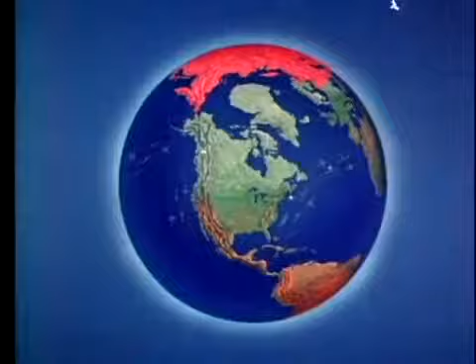Sprawled across North America, from the polar ice cap to the Mexican border, is a giant with 1,000 eyes. Day and night, fair weather or foul, he guards his homeland. This giant is the air defense system of North America, a vast and intricate maze of radar networks. And through the electronic eyes of this giant, we are able to see the enemy before the enemy sees us.

These radars never sleep. Round the clock, they stand ready to do their part in minimizing the penetration of enemy bombers. And round the clock, their quietly pulsing hearts, the magnetrons and the klystrons, help generate the power for peace that keeps America strong.

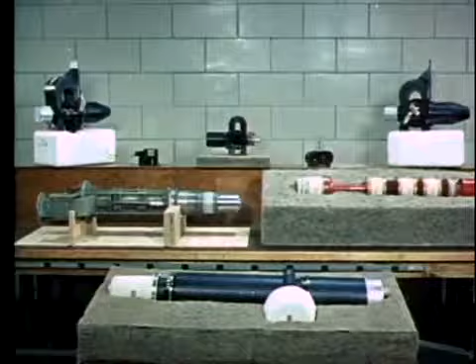These microwave power tubes, the magnetron to generate the radar signal, the klystron amplifier for radio communication, and radar are the subject of our story. It is a story about these vital tubes, but even more about you, the men who work with them. When you have a well-trained maintenance man with a well-adjusted radar at a well-chosen site, then you've really got a winning team.

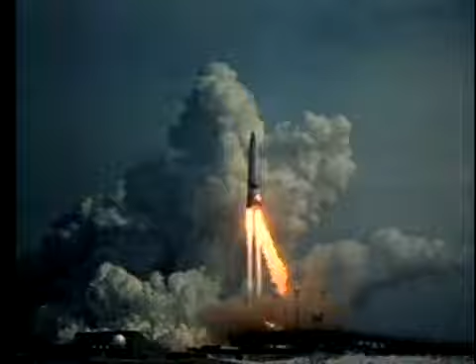They keep the airborne radars operating and ready for crucial missions. In missiles that depend upon radar for guidance. In bombers that depend upon radar for bombing and navigation. In interceptors that depend upon radar for fire control. And in reconnaissance and search aircraft that depend upon radar to extend their vision.

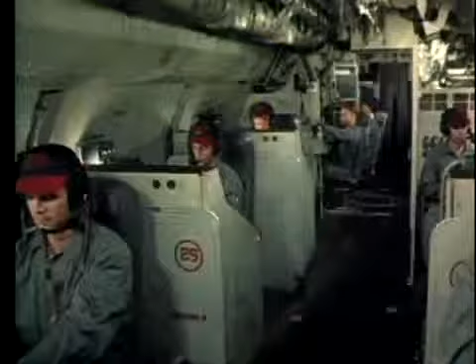Years of scientific research and millions of dollars worth of equipment have gone into this aircraft. But only if the maintenance men keep the radar functioning can it complete its mission. When something goes wrong, they've got to make a quick decision, whether to attempt repairs in flight or abort the mission.

There's trouble here, that's for sure. But what kind of trouble? First, they check the radar scope presentation. Sometimes this gives a clue. But the most reliable analysis comes from the test equipment on the monitor panel.

The spectrum analyzer shows them the conditions in the circuit. It tells them what part of the equipment is malfunctioning and helps trace the cause of trouble. Here's the RF spectrum waveform. The output pulse of this radar transmitter is definitely abnormal. This is the way it ought to look. But this presentation clearly shows a disturbance, probably caused by arcing in the antenna waveguide.

The cause might be moisture in the waveguide, corrosion, dents, or scratches. Another trouble spot could be the pressurized antenna system. Loss of waveguide pressure will also cause arcing. Yes, the pressure's low. This is a danger signal. If this arcing continues, the magnetron output window may be damaged, the tube's vacuum lost, and the magnetron destroyed.

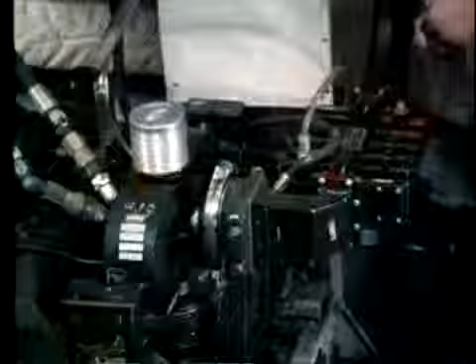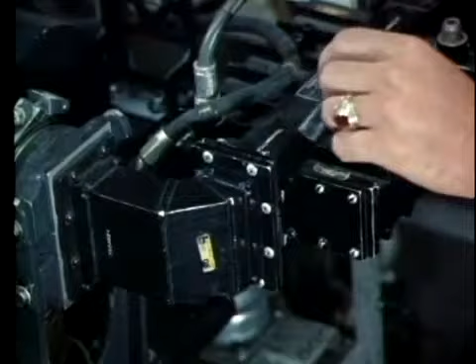Waveguide joints should be tested to make sure they're airtight. This man is making a liquid soap test. See where the bubbles are forming? He's found the trouble. But how serious is it?

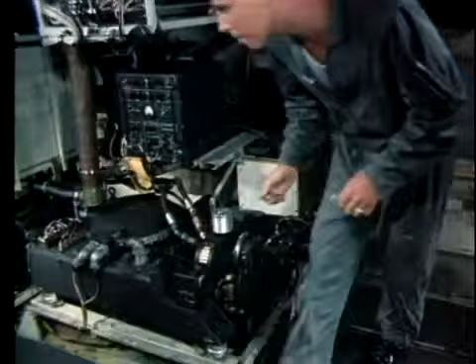He checks the spectrum analyzer again. It looks bad. See how the pulse has changed? Finally, the main pulse deteriorates completely. Bad news. The magnetron is seriously damaged. It's beyond repair. This means shut down the equipment and get ready to install the spare.

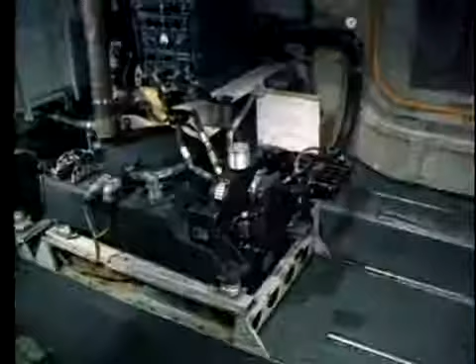While they're working, let's take a look inside the magnetron. Animation shows what caused the malfunction. We'll turn time back a few hours and show the Maggie functioning normally. As the pulse from the modulator is applied, the Maggie produces radio frequency oscillations to form the radar pulse.

This energy is then coupled into the waveguide and directed to the antenna for transmission. Energy is reflected back along the waveguide toward the magnetron. Normally, when the antenna system is in good shape, the reflected wave won't be strong enough to cause arcing at critical points.

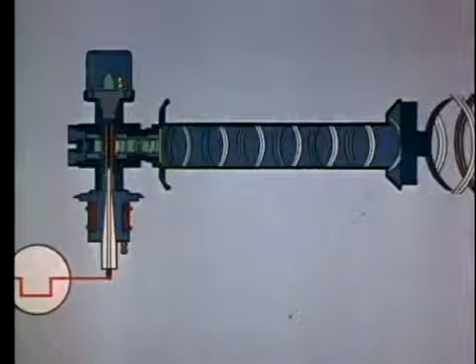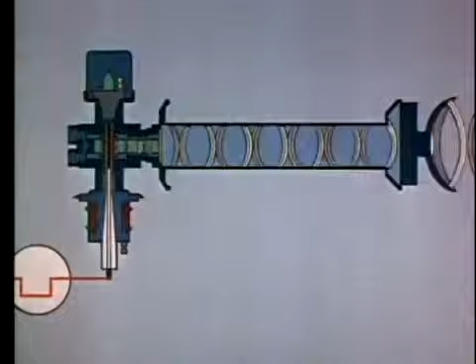But as conditions such as loss of waveguide pressure develop, the antenna characteristics change and the reflected wave becomes greater. Then arcing may take place at the point where the radar wave leaves the magnetron, causing the magnetron output window to crack or puncture. As the vacuum is lost, the heater oxidizes and burns out. The cathode cools. Air seeps into the interaction space, and arcing occurs with each pulse.

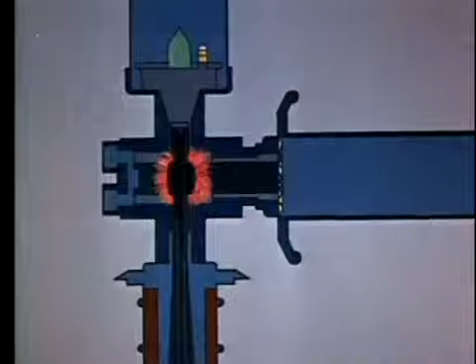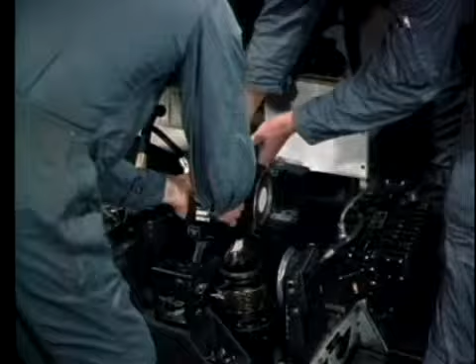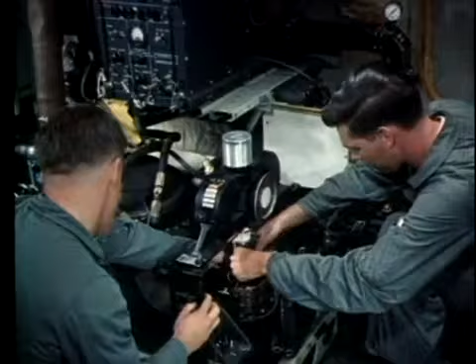After the magnetron has been unbolted, the filament and cathode connections are uncoupled. A large magnetron like this one requires 2 men to handle it safely.

Before a Maggie is replaced, all connections, mating flanges, and sealing surfaces should be inspected. Insulating oil should be examined for foreign matter. Damaged or worn gaskets should be replaced.

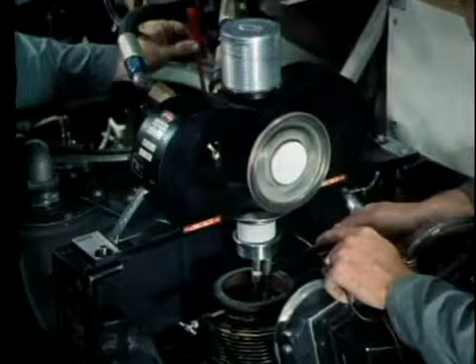Heater supply voltage should be established at the value marked on the tube. Later, when the plane returns to base, the heater voltage should be double-checked with an accurate instrument.

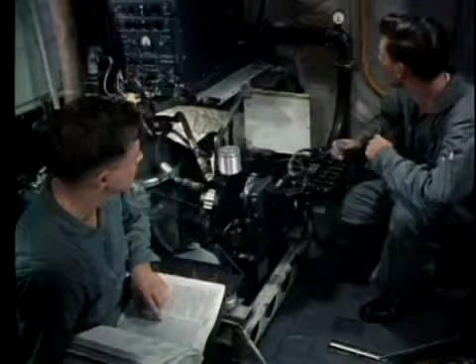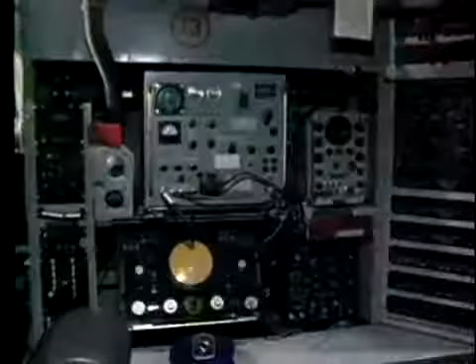Now that the spare magnetron has been installed, further tests are necessary. The technician must make sure he has the required pressure and that there are no air leaks. Instructions concerning the care of pressurized antenna systems will be found in the appropriate tech order handbook. The liquid soap method is a simple way to check for pressure leaks and may be used where more accurate means of testing are not available.

Test equipment is used to analyze the performance of a newly installed tube. The output pulse is checked on the spectrum analyzer. See how the large hump or main bang is symmetrical and sharply defined. The side lobes are relatively small. A presentation like this means that the Maggie is firing properly.

Not only that, it means that these technicians know their jobs. They were able to analyze the trouble correctly and replace the magnetron in flight. Because they knew what to do, this aircraft was able to complete its mission.

Let's take a closer look at these microwave power tubes. Magnetrons costing from $100 to $10,000.

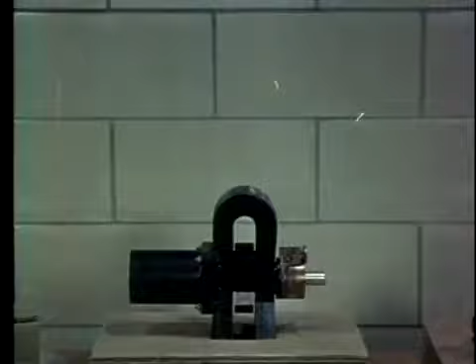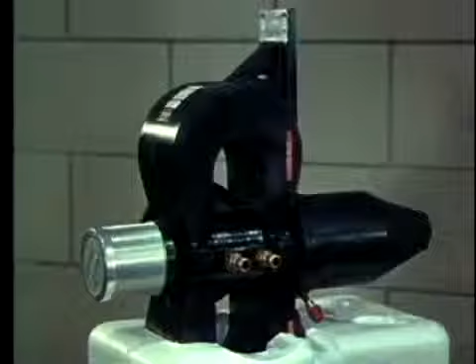Klystrons costing from $1,500 to $25,000. Why so expensive? Let's see what's inside them. Look at this. Parts so critical, they must be inspected through a microscope.

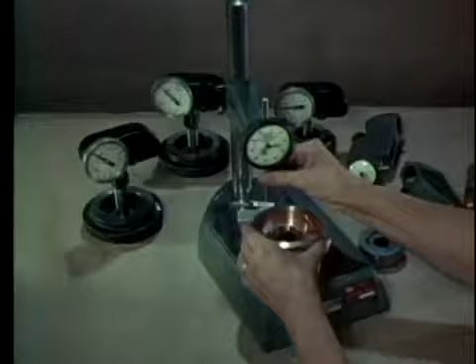Tolerances accurate to 4/1000ths of an inch. To build them to such close tolerances requires involved manufacturing processes. Specialized parts must be carefully assembled.

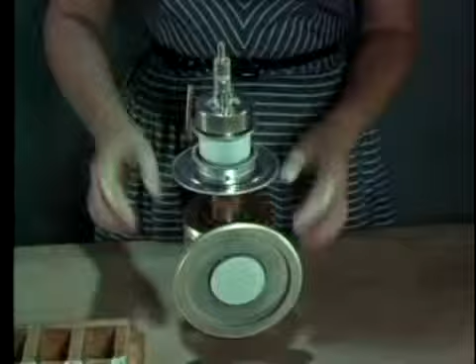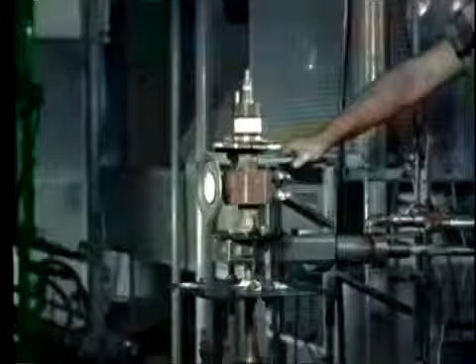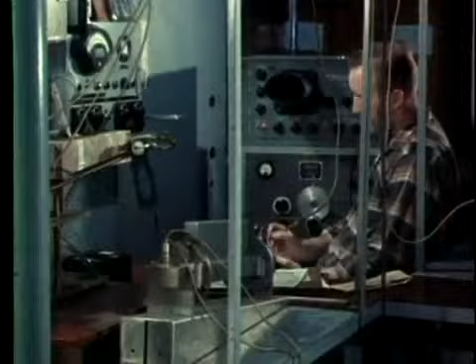The completed assembly is heat treated to bake out gas molecules, so that they may be removed by an evacuation machine. External mechanical parts, such as couplings and magnets, are installed. The final step is rigid testing of electrical performance to make sure it meets the high standards required.

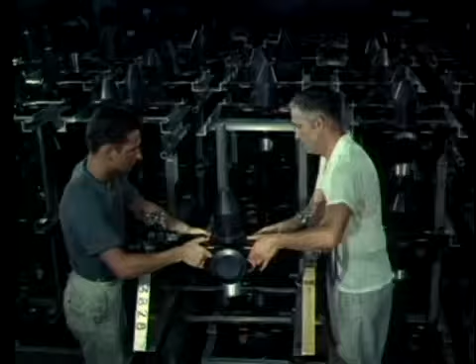Pressure tests ensure leak-proof connections throughout. Now the tubes can be put into storage. Even here, should tiny defects develop while on the shelf, continuous sample testing will reveal them. Before shipment, the delicate tubes are carefully packaged.

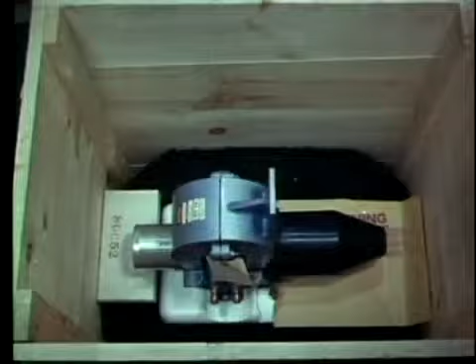The quality designed in during research, built in during manufacture, maintained by rigid testing and careful storage, will reach the user intact.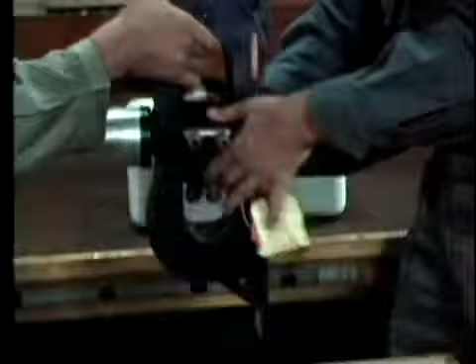Here are a few basic rules on proper handling. Always use 2 men to lift a heavy tube. A portion of a carton makes a good tube stand, protecting delicate parts from damage. But a wooden rack is better and lasts longer.

Save all the cartons and packaging materials. Use them to return defective tubes to the factory.

Magnetrons should be separated at least 12 inches. Then their magnetic fields won't interact. Don't store them on steel shelves or they may be degaussed.

Don't use steel tools. Use non-magnetic tools. Following these simple rules will save time and trouble, prevent damage, and save the Air Force many thousands of dollars each year.

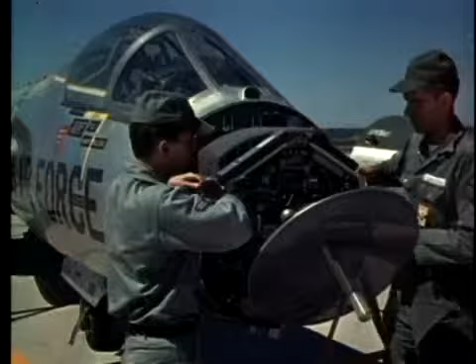On most of the smaller high-performance aircraft like this one, it is not possible to do in-flight radar maintenance. Therefore, most of the work must be done in the electronics maintenance shop. This aircraft has just aborted an intercept training mission. The reason: radar malfunction. Had this mission been the real thing, an enemy bomber could have broken through our defenses.

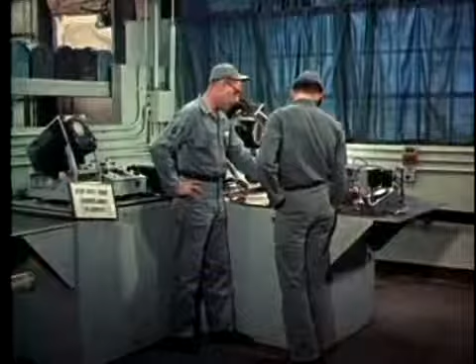The maintenance man's job is to find out why the radar malfunctioned and correct the trouble. You'll see that although these radars come in smaller packages than those on larger aircraft, they are just as big a maintenance problem. The maintenance supervisor is in charge of this work.

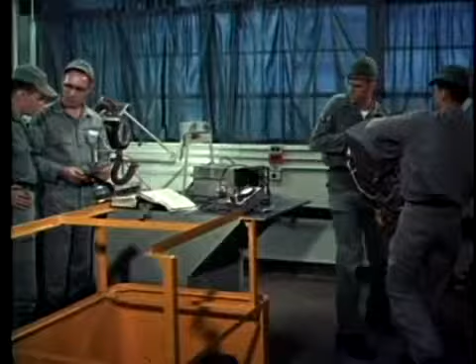Before teardown of a defective black box is started, the operational defects should be identified or at least isolated to a particular subchassis. The pilot's report on the radar failure may give a clue. Comparing the report of malfunction with equipment handbooks may also help to isolate the defect. But the best aids to repair are the analytical approach of the technician and the special test equipment he uses.

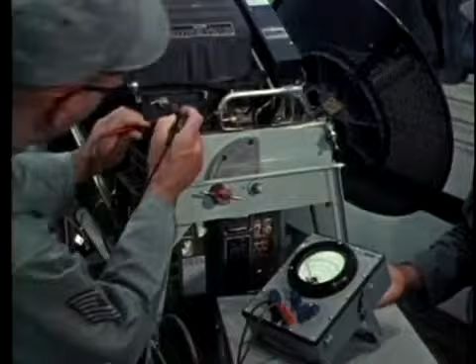An important point to remember is that the transmitter malfunction may be caused by parts other than the magnetron. Wherever possible, other circuit components should be checked before power is applied. A simple resistance check will often reveal a short circuit.

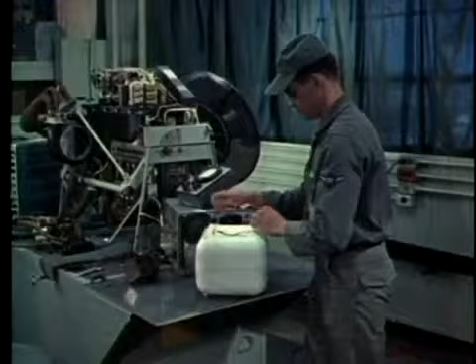That's what the trouble is here. The airman will carry on from here and trace the short circuit. So far, so good. He's found a shorted filament transformer and replaced it with a new one. But what's this? He's decided to change the magnetron, too.

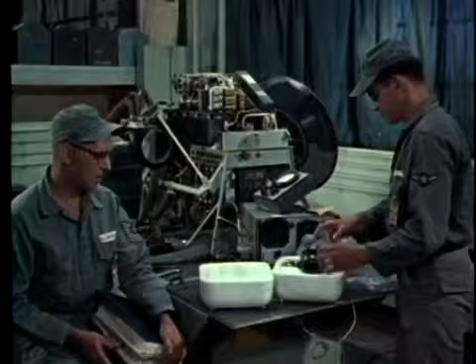The supervisor disagrees. Tube swapping is not a good idea. The old magnetron should be thoroughly tested before any decision is made. Testing showed that the old magnetron should be replaced. This has been done. Now let's see how the new Maggie behaves.

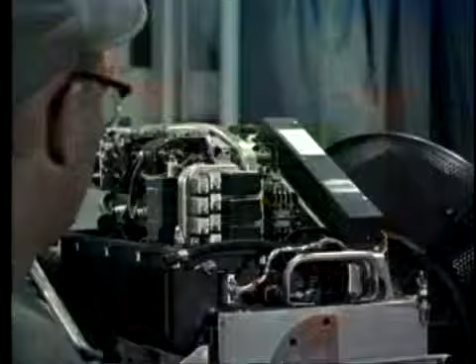This is confusing. The spectrum analyzer shows arcing. Let's look inside the tube and see what's causing it.

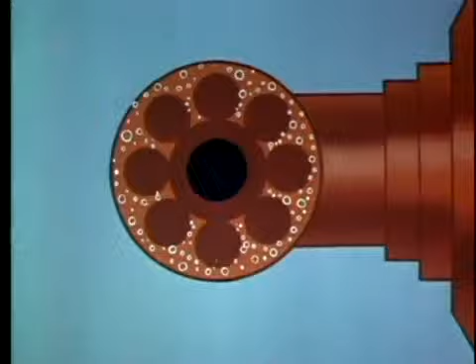Magnetrons are made of porous metals, which usually trap a small amount of residual gas. During storage, gas molecules migrate into the interaction space surrounding the cathode. When the tube is installed and power applied, it will operate normally if the gas content is low. But if gas content is high, arcing will occur with each modulator pulse.

This arcing might be mild or severe. Frequently, tubes with residual gas can be restored to normal operation by a suitable break-in or seasoning period. During break-in, the gas molecules are driven back into the walls of the tube, and normal operation resumes. If the equipment is operated frequently, normal operation should continue throughout the life of the tube.

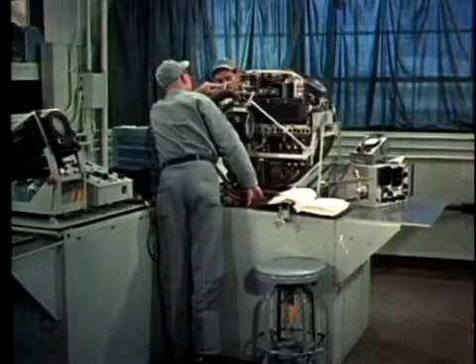Occasional individual arcs may also be noted in a normal tube which does not contain gas, but this behavior is due to transient conditions and should be considered as normal. All new tubes which display arcing when they are first installed should be thoroughly tested and analyzed before being discarded. This will save the government both time and money.

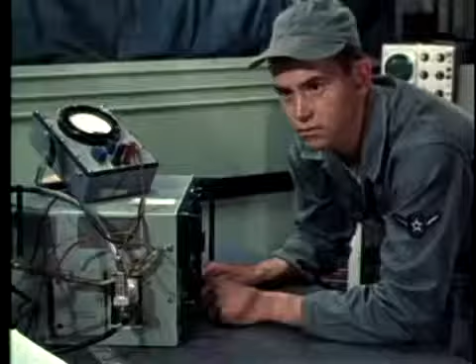The repairs are finished. Now comes the break-in procedure. Proper break-in can clear up various degrees of internal arcing. But watch the spectrum analyzer carefully. If frequent arcs occur, switch to standby immediately.

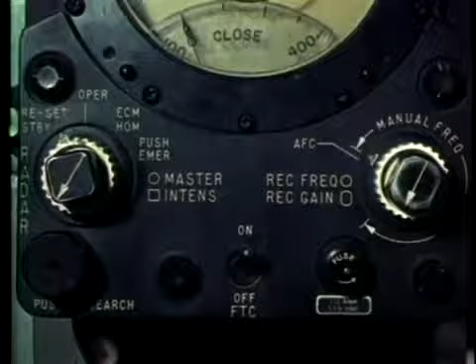Small magnetrons may be damaged if severe arcing is allowed to continue more than 2 seconds. The range selector switch must be changed to short pulse before the magnetron is operated.

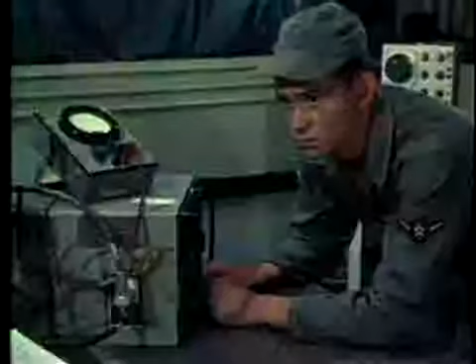If only sporadic arcing occurs, operation may continue. But a series of arcs may cause the overload to pop. In this case, reset the switch and continue the break-in.

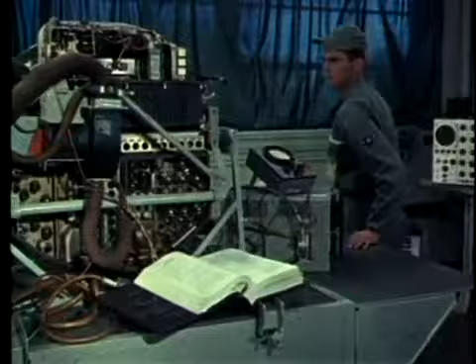To avoid possible damage during break-in, the technician should keep a close watch on modulator tubes and other components of the RT unit. The time required for break-in will vary with the tube, conditions, and methods used, but normally break-in can be accomplished in 20 to 60 minutes.

When break-in is complete, and only infrequent arcs or misfirings occur, operation may be regarded as normal, and the equipment made ready for service.

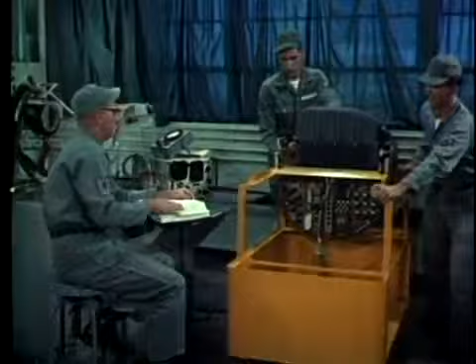In addition to the airborne radars, there are a great many ground radar sites scattered about the continental United States and Canada. They are found in almost every type of American scene: the dusty expanse of the plains, the northwoods, the heat and humidity of the deep south, the rolling farmlands of the Midwest, and the saltwater scenes of our coastal areas.

Each of these has its own problems of maintaining and efficiently operating its microwave power tubes on a round-the-clock basis. Some of this equipment is completely automatic, but experienced technicians are always nearby, just in case. At the many radar sites where there is no standby equipment, the maintenance man is an even more vital unit in the organization.

In the operations room, observers keep constant watch on the radar scopes. Here's trouble developing.

When equipment starts to malfunction, quick repair is a must. These men are so used to the sound of the equipment, they can tell by listening whether the magnetron is operating or not. It's not.

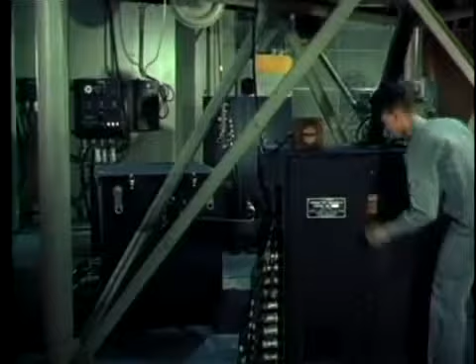Something caused this radar to quit. What was it? Sometimes the meters will tell the story. The filament current has dropped to zero, and the filament voltage is too high, indicating that a portion of the heater element is open. A quick, careful analysis has to be made.

Here is where maintenance skill and training pay off. The question is, has the magnetron become inoperative because of heater failure? Or is there another cause?

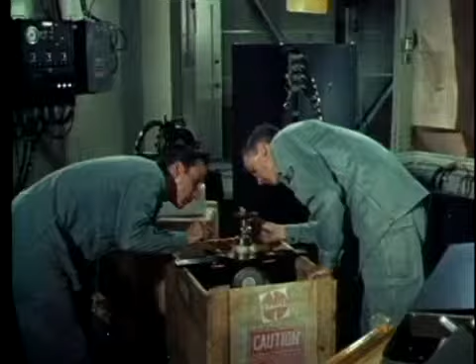Yes, here's something. The insulator is pitted. High-powered magnetrons like this one have insulator bushings immersed in oil. It might be that the insulating oil has broken down. Better check this.

Here's the answer. Contaminated oil. The oil failed to insulate. Oil can break down after long exposure to heat and high voltage. Oil may also be contaminated by dust, moisture, metal particles, or air bubbles.

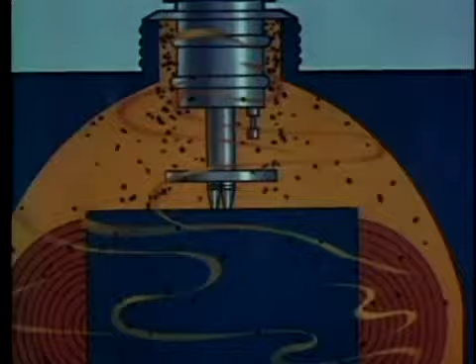Here is how contamination breaks down oil. As contamination accumulates in the oil, current paths are created between high voltage terminals and ground. As the condition becomes worse, due to increase of contamination and change in oil structure, a definite high voltage path for corona discharge is created in the oil.

The corona discharge begins to erode the surfaces of the insulator. As the insulators are penetrated, the vacuum in the tube is destroyed, and the tube is damaged beyond recovery.

The maintenance men have completed oil replacement using all precautions to prevent contamination. They have checked the grade of oil against tech orders and factory instructions.

But before installing the new Maggie, all mating surfaces and flanges must be inspected and cleaned or replaced as required. It is also necessary to check waveguide parts, replace gaskets, coolant hoses, oil fittings, and so forth.

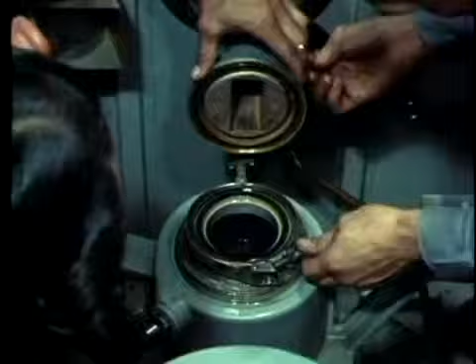Be sure all electrical connections are secure. Careful, watch out that terminal doesn't hit the cabinet. That could ruin the tube.

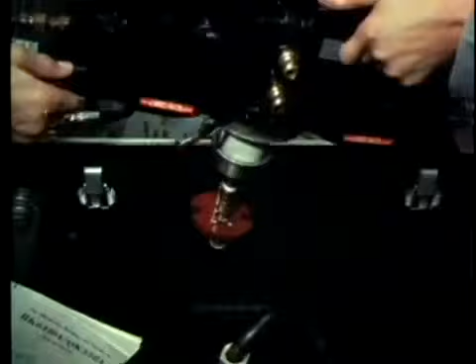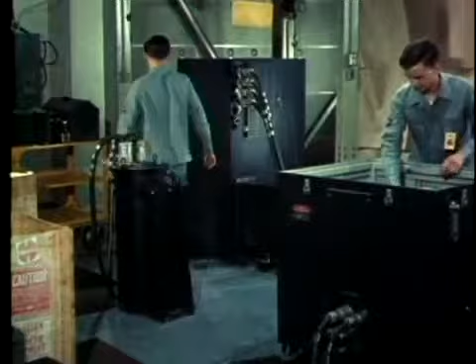Make certain that all clamps, bolts, coolant hoses, and so forth are secure before operating the tube. All set? Okay, hit the power button. Uh-oh, that one didn't last long.

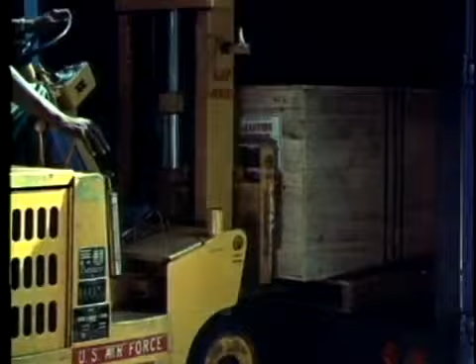There are many reasons why new tubes may fail to function properly. One of the primary causes of tube failure is damage sustained during transportation and handling. This damage may occur during shipping or in the depot, or during Air Force distribution to the base.

Here is what actually happened to that new tube which failed to operate. Nobody saw it happen. Nobody's going to tell. And nobody's going to get the slightest use out of that magnetron.

But these men don't know this Maggie fell off a truck. They just know it won't work. Could it be something wrong with the rest of the equipment? A short circuit? A bad connection? Or should they pull out this Maggie and install another?

They've installed another new Maggie. They've also followed correct procedure, allowing the heater to warm up 5 minutes before applying power to the anode. Ah, it works.

But wouldn't it have saved them a lot of time and trouble and expense to the government if that delivery man hadn't dropped the Maggie off his truck? You see, the maintenance man really is important. If he does his work correctly, so will the radar. The magnetron is only one type of microwave power tube used by the Air Force.

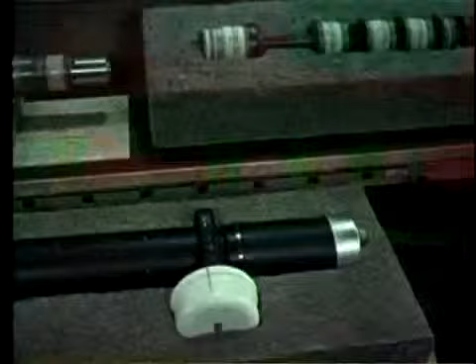Another very important type is the power klystron. Klystrons are made in many shapes and sizes. All of them are powerful and expensive, ranging from $1,500 to $25,000.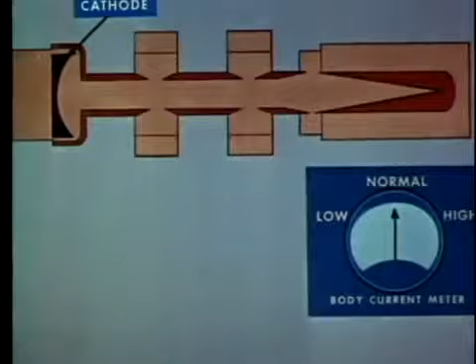Let's look inside a typical two-cavity power klystron and see how it operates. The beam current is emitted by a heated cathode and passes through the drift tube sections.

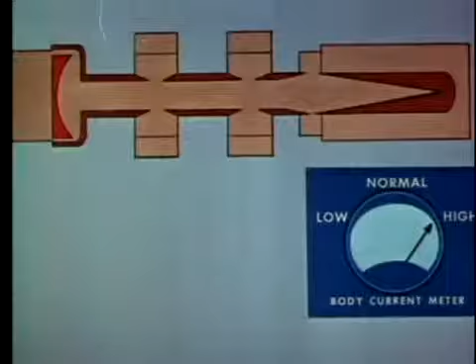Since electrons in the beam have like charges, they repel each other and tend to diverge, to be absorbed by the walls of the drift tube sections. But electromagnetic coils placed along the tube align them into straight paths. However, misalignment of the focus coils can seriously damage the drift tube tips. Therefore, it is most important to adjust the magnetic coil currents properly during installation of the tube.

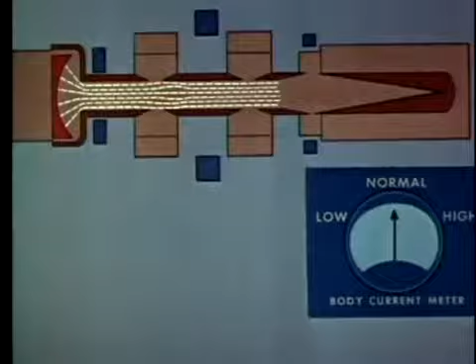When a steady direct current is flowing through the tube, an RF signal from the RF driver stage is introduced into the first cavity resonator. As the cavity is tuned to resonance, a strong RF field appears between the drift tube tips, which form a gap in the resonator.

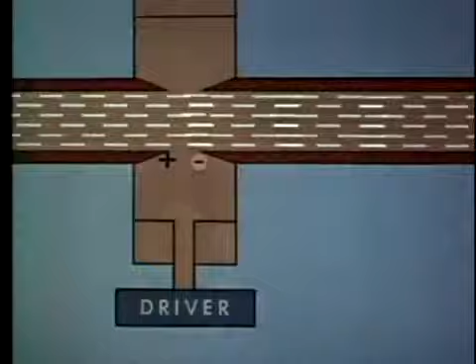The electrical charges on these tips alternate at the driver frequency rate on opposite sides of the gap. At the same time, individual electrons in the beam are being accelerated or decelerated at the RF frequency rate. This produces bunching of the electrons as they approach the gap in the second resonator. There they are decelerated and release energy. The resonator converts this energy to RF energy and amplifies it.

Additional resonators are sometimes provided for greater amplification. From the last resonator, the amplified RF signal is coupled into the waveguide and transmitted to the antenna.

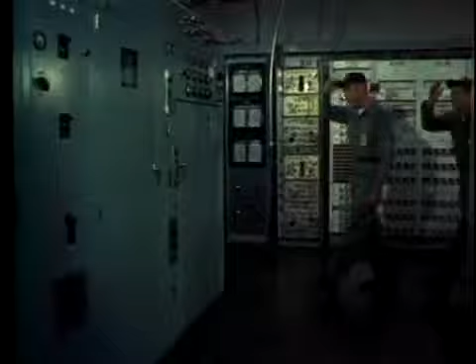This transmitter has dual equipment. One transmitter operates while the other is on standby in case of emergency. The equipment is automatic. Meters and instruments keep a constant check on its operation, and a warning light flashes in case of trouble.

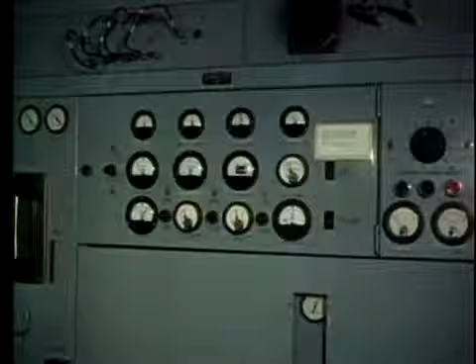Readjustment of the output cavity and coupler may correct the trouble, but the arcing continues. Since adjustment won't correct the trouble, all they can do is shut down the transmitter for repair and switch over to standby.

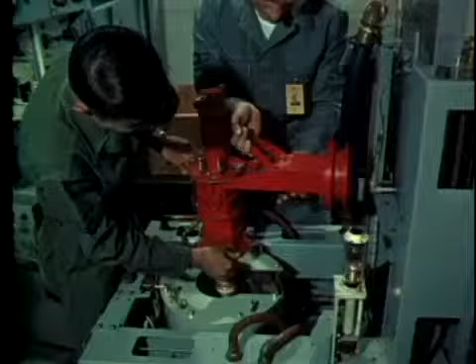The klystron has been removed for inspection. It may have been damaged by the arcing. Yes, the output ceramic is badly damaged.

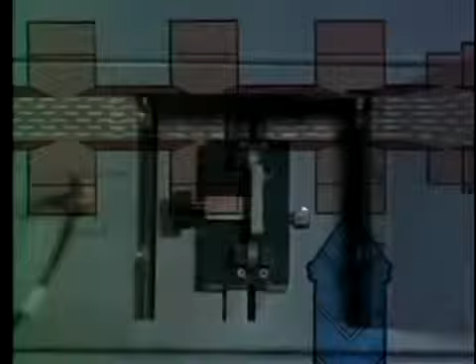An important consideration in maintaining the klystron is the proper adjustment of the impedance matching unit. In this case, improper adjustment of this unit during installation ultimately caused the arcing in the output section, which in turn destroyed the tube.

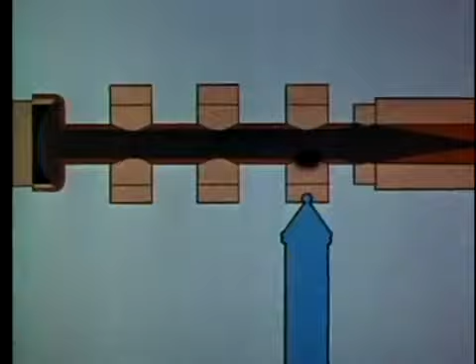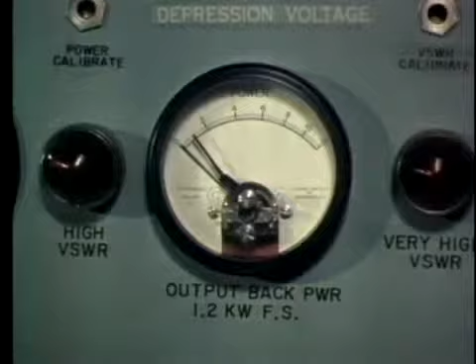There are two types of meters which help maintain proper coupling: the power output meter and the VSWR, or voltage standing wave ratio meter. These measuring devices should periodically be checked for accuracy. But in general, the best way to avoid damaging or destroying the klystron is to study and thoroughly understand the

various installation and operating instructions furnished by the equipment and tube manufacturers. Only by doing this can Air Force technicians and maintenance men hope to get the full operating life from their klystrons.

At the Tropo Shack, the maintenance men have installed the new klystron. But before operating at full power, they are careful to recheck all circuit meter readings and coolant flow gauges. These meters are important because a minor error in one of the adjustments might shorten the life of the tube.

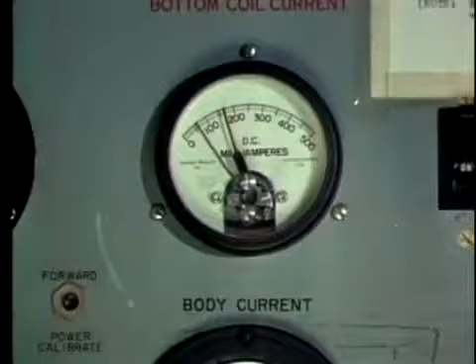The power klystron is really a very dependable piece of equipment if properly treated. Once it has been correctly installed and aligned, it requires very little maintenance during its long service life. A good rule to follow is: install it carefully, align it properly, then leave it alone.

As the progress of aircraft and air defense continues, other and more varied uses will undoubtedly be found for microwave power tubes. With these new applications will come new problems to be solved by maintenance men of the future.

Those men will tread the paths charted by technicians of today, who found that this type of maintenance can be simplified by careful attention to four basic factors: careful handling, proper break-in, avoidance of tube swapping and trial and error maintenance, and the timely use of maintenance aids such as test equipment, tech order handbooks, and manufacturer's information pamphlets.

There is no substitute for know-how, initiative, and ingenuity. Yet no one man or group of men can do this job alone. Maintenance is a team effort. Only by the cooperation of procurement, supply, transportation, and every department concerned can the Air Force continue to operate the reliable radar equipment which is such a vital part of national defense.

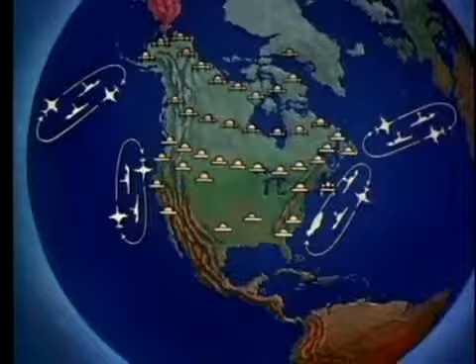Only by continued teamwork and devotion to duty can the radar eyes of America guide us to that peaceful tomorrow, which is the reward of nations who stay alert today and every day.